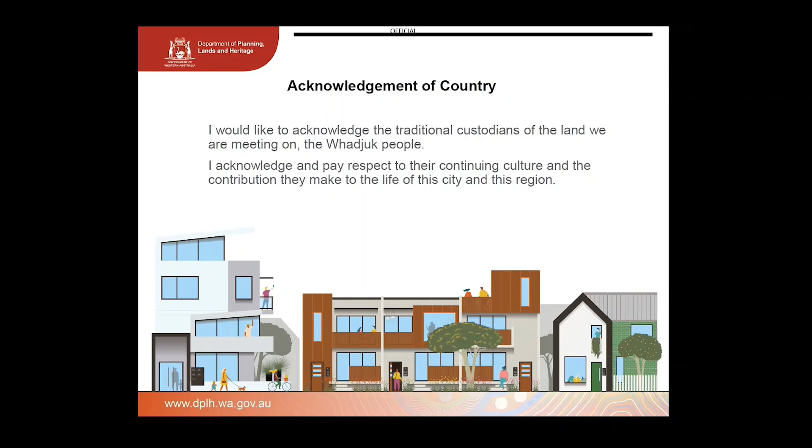So when the project first started, that problem definition phase was undertaken, and it was found that typical medium density development in the state was characterised by excessive site cover, and this included excessive site cover in both greenfield locations and infill locations. It was also characterised by a loss of vegetation and tree canopy, and this was really the removal of existing trees that occurred during the subdivision stage, both in greenfield and in infill, and trees not being replanted or replaced on development sites.

So streetscape was often dominated by garages and crossovers, particularly in greenfield development where narrower lots had double car garages. There was impact on the functionality of internal layouts and room sizes, and we saw a lot of really small bedrooms and small living areas that were really not very functional at all. There was a lack of housing diversity with predominantly 3-bedroom houses with 2 bathrooms and double car garages, and there was a lack of 1- and 2-bedroom housing available.

There was insufficient daylighting, winter solar access and natural ventilation, and really just overall really poor quality outdoor spaces, often largely covered with patios, which impacted the daylighting and solar passive design performance of the dwellings, which led to high household energy consumption.

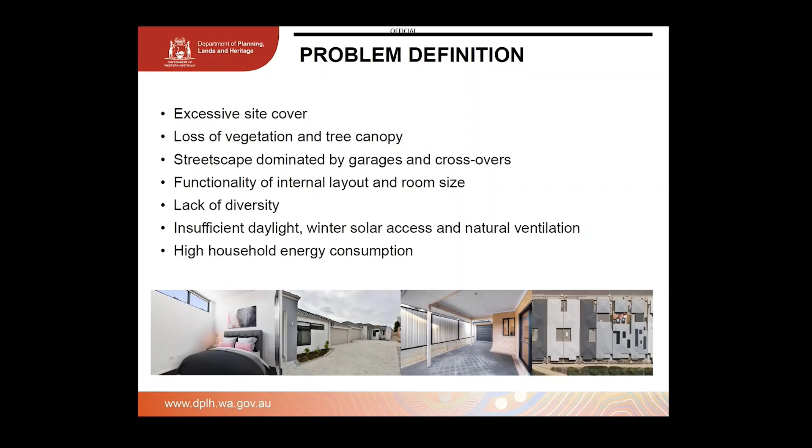So really the policy seeks to counter these issues that we saw and deliver better quality medium density housing. The policy has the opportunity to provide more affordable and right-sized homes and providing more housing choice through incentives for 1- and 2-bedroom houses. It aims to deliver access to sunlight and improving comfort for users and occupants of the dwellings and providing better solar passive design outcomes through solar access requirements.

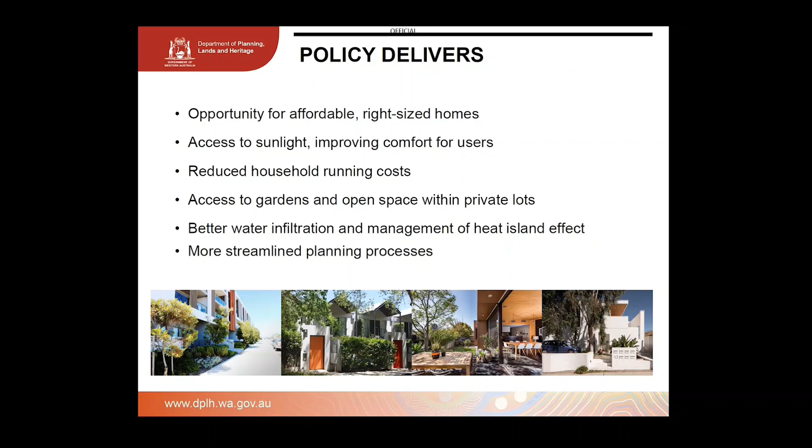It aims to reduce household running costs and have better access to gardens and open space within private lots themselves. So there's larger garden requirements as well, and garden and soft landscaping requirements. It also aims to provide better water infiltration and management of the heat island effect, and this is mainly through permeability and tree requirements. And it provides a more streamlined planning process, so really aiming to provide more clarity for assessors and proponents.

So the policy overview: the R Codes are broken into 2 volumes. There's Volume 1 and Volume 2. So Volume 1 now consists of 5 parts, from Part A through to Part D and appendices. Part A is the operation of the code. Part B includes built form provisions for low density from R2 to R25 for single houses and group dwellings, and R10 to R25 for multiple dwellings.

Part C is the new part to the code, and it applies to medium density built form provisions, and it applies in single houses and group dwellings in R30 plus and multiple dwellings R30 to R60. Part D is the land component, which includes provisions for site area and subdivision.

The R Codes Volume 1 also has an additional document, the explanatory guidelines, which has now been updated to provide further clarity on medium density outcomes for designers and for local governments. And the R Codes Volume 2 now applies to R80 plus multiple dwellings and ROC coded land, with just minor consequential mods following the policy review.

So Part A, operation of the code, establishes the purpose, application and operation of the code and remains fairly unchanged in comparison to Parts 1 to 4 of the existing R Codes. So there is now an additional provision for local planning frameworks seeking to modify the R Codes. And there's a requirement they now need to be consistent with SPP 7 Design of the Built Environment.

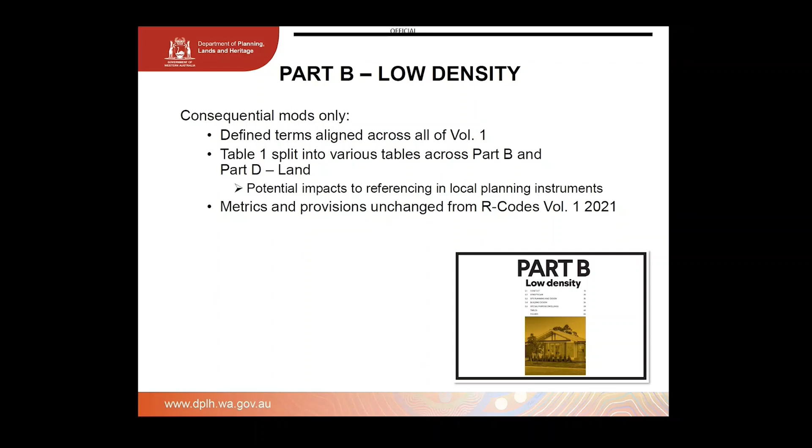So the current R codes remain applicable to low density coded lots at R25 and below in Part B of the R codes 2023. Consequential modifications have been made to some provisions, mainly relating to changes in the definitions. Table 1, the primary controls table, has been split, with the primary controls relating to built form such as open space, setbacks and OLA still remaining with Part B low density. The minimum and average site area requirements have been moved into Part D land. Other metrics and provisions have remained unchanged from the R codes Volume 1 2021, the previous version.

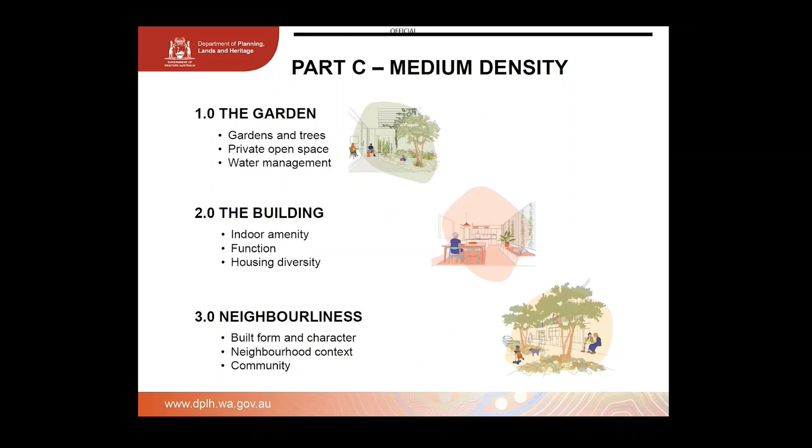Part C, medium density, is split into 3 sections. Section 1 is the garden, and we've put this section first because we wanted to prioritise the location and design of the garden in its ability to provide natural light, daylighting and natural ventilation into the dwelling. Section 2, the building, includes elements relating to the dwelling. So we move internal to the dwelling, trying to ensure better internal performance and occupant amenity. Section 3, neighbourliness, relates to neighbourhood context, so the impact of the development on the neighbours. These elements guide the design of development having regard to local streetscape, residential and community impact. And Blair will take us through some of the key changes to Part C.

So the first element of the garden is private open space. In the R codes 2021, we do have outdoor living areas, so we've improved on this existing element. With private open space, we have a minimum primary garden area. Previously, it was based on the R coding. We've now changed that to the site area. What we found was that sites coded at a higher density were getting reduced garden area sizes, but the dwelling was mainly a lot larger. So we've now switched it to the site area. It doesn't matter about your density code; it's your site area that impacts the size of your garden.

There is a minimum dimension of 3 metres, and we also have the existing 2/3 without roof cover requirement. But we've also added a requirement that where your site is below 161 square metres, you are not permitted to cover any portion of your primary garden area. That's making sure that you work with the primary living space and create a better connection between those 2 elements. As I said before, the intent of these changes was to get a more usable garden area appropriate to the dwelling size and improve access to daylight.

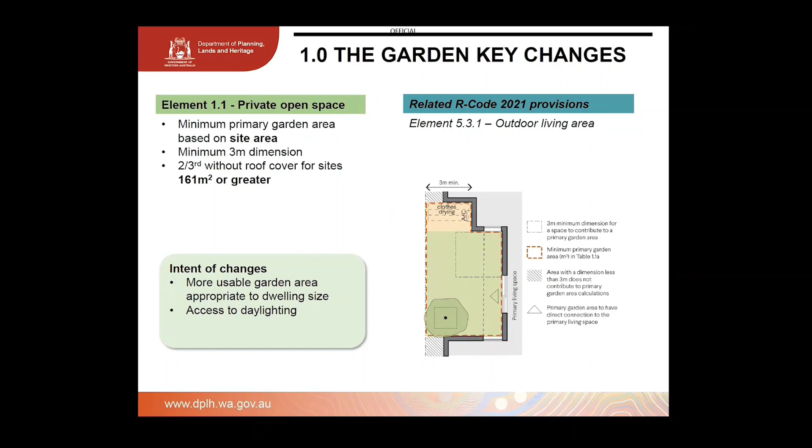Element 1.2, trees and landscaping. We've improved on element 5.3.2 landscaping of R codes 2021. Previously there was a requirement for 1 tree. We've improved this to 1 small tree. The tree has to be a minimum of 3 metres high at maturity, and it needs to have a 9 square metre deep soil area, to ensure that the tree grows. The deep soil area has a minimum dimension of 1.5 metres, and when your primary street setback is greater than 1.5 metres, we also require 1 small tree in that area too.

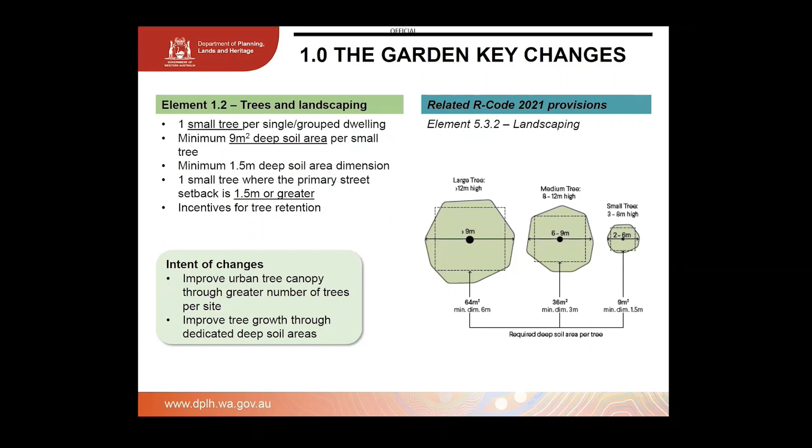We also have incentives for tree retention. If you retain a tree on site, you get a site area concession for a multiple dwelling development, which we'll discuss later in the slides. You can also reduce your landscaping when you retain a tree on site. The intent of these changes was to improve the urban tree canopy through a greater number of trees and also a larger size of tree per site.

On the same element, we require 15% of the overall site to provide soft landscaping. Previously it was landscaping within the R Codes 2021. We've introduced a new definition of soft landscaping, which has a minimum depth requirement in the definition. We also have a 1 metre dimension for soft landscaping.

Under the new R Codes, the front setback area has had its landscaping requirement reduced from 50% to 30%. This has been done because overall the site has to have more landscaping than what the previous R Codes required. The intent of these changes were to improve water infiltration, reduce the urban heat island effect, and improve the streetscapes.

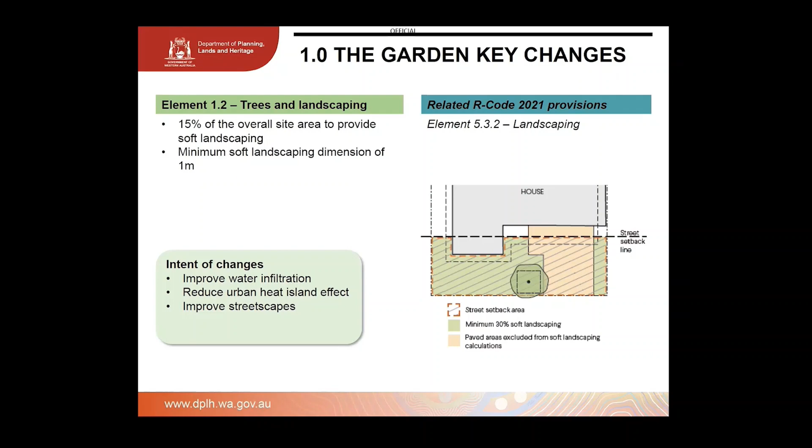So the next section of the medium density code is the building. The first element of that is size and layout of dwellings. Under the R Codes 2021, it didn't really consider the indoor amenity of dwellings, so this is quite a new element to the R Codes.

We did have the primary living space requirement in the 2021 R Code, so we have improved on that. We provided a minimum dimension of 3.8 metres for the primary living space, to ensure that we get a functional primary space within the dwelling. That primary living space has to have direct and physical access to the garden, making sure we have that good connection with the garden.

We also have minimum dimensions for the bedroom, so that's 2.7 metres for the bedroom, and then a minimum 9 square metres for the floor area. Similar to the primary living space, we want to make sure it can be furnished and is a functional area, and for the bedrooms, really to make sure you can fit a double bed in each one. The intent of these changes were really just to improve the amenity of the indoor area and improve the functional use of these spaces.

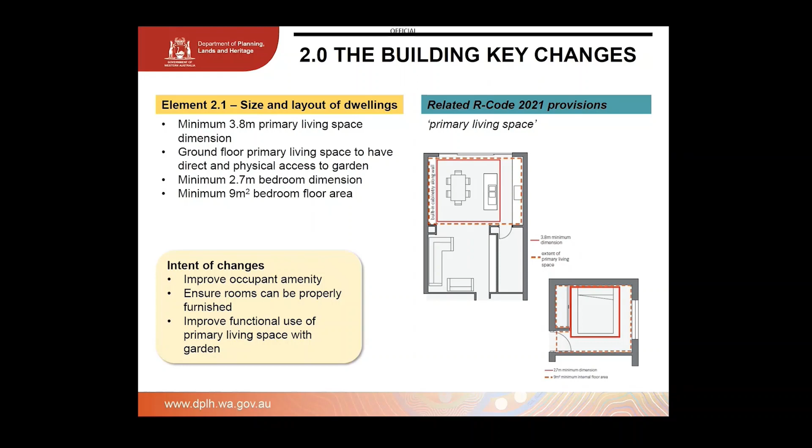Element 2.2, solar access and natural ventilation. Similar to the previous element, this is quite a new provision in the R Codes. We've introduced a minimum of 1 openable external window for each habitable room, which complements the NCC.

With the primary living space, we require a major opening to be oriented between northwest and east. That major opening needs to have an external uncovered area abutting it of a dimension of 3 metres by 3 metres, to make sure we get good daylighting into the primary living space. The 3 by 3 area also prevents an alfresco from covering that good window and blocking daylighting into the primary living space.

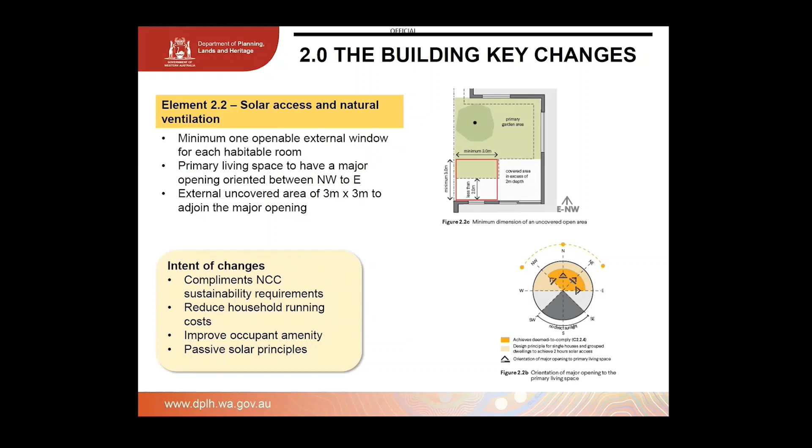The intent of these changes were really just to reduce household running costs by getting good daylighting in, improve occupant amenity, and introduce passive solar principles into the R Codes.

Next element is parking, everyone's favourite element of the R Codes. We have introduced provisions that allow 0 parking bays, where a dwelling has 2 bedrooms or less and is located in location A. You're permitted to provide 0 parking bays.

We do have restrictions on the number of garages and carports you can have on your site. This is really just to make sure we're focusing on providing room for the dwelling and the garden over garages and carports. There's no restrictions on uncovered bays or basement parking, and we do have some bicycle provisions for multiple dwellings.

As I said before, the intent of these changes are really just to focus on the people rather than parking, so provide more space, be it in your primary living space or in your garden, and also just to reduce the extent of covered parking on site. Where your bedroom does not satisfy the minimum dimension and area requirements, it will not contribute to your parking calculations. So you have to think about providing the right number of bedrooms if you want to achieve a greater amount of garages or carports.

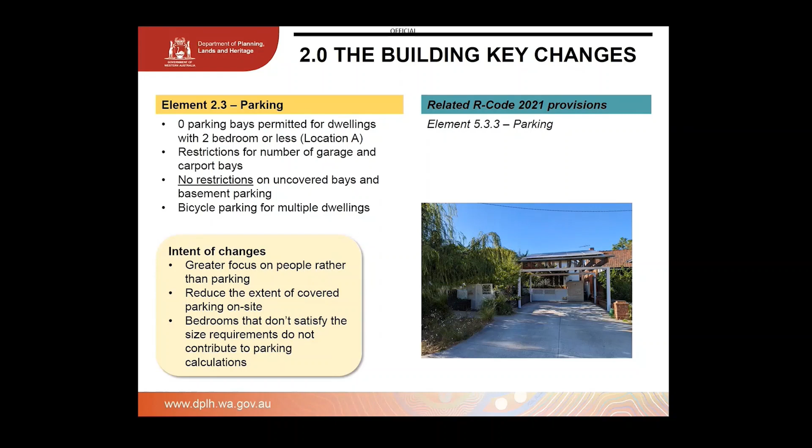So this is just an example of a house design under the medium density code. On the left is a house designed under the R Codes 2021, and on the right is a dwelling designed under the R Codes 2023 during the design testing phase.

As you can see here, the garden is located within the centre of the site, and that's providing a lot more daylighting to the whole dwelling. There's also dual daylighting, from the southern part of the primary living space and the northern part of the primary living space.

We also have 2 trees on site, and you can see the trees are a lot larger than what the previous R Codes required. With the boundary walls, we've got dual boundary walls. We've also got reduced setbacks, so the setbacks of the walls have been reduced down from 1 metre for a 1-storey dwelling.

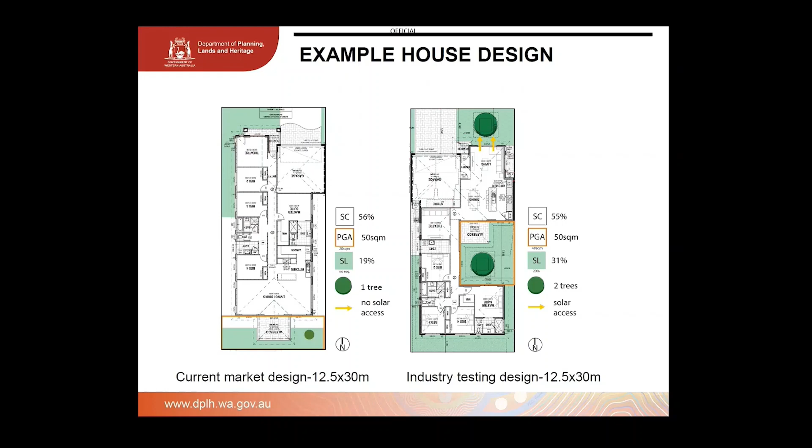This element relates to element 5.5.2, aged or dependent persons dwelling. In part C of the new R Codes, there is no longer an aged or dependent persons dwelling requirement - it's now called universal design. There's gold level universal design requirements that are required to be eligible for a site concession.

There's also a 20% silver level universal design mandated for 10 or more grouped or multi-dwelling developments. Compared to the aged or dependent persons dwelling, we've removed the over 55's occupancy restriction, as well as the minimum of 5 dwellings. This is really just to allow greater uptake of universal design requirements, to allow more dwellings to provide more allowance for ageing in place and greater housing diversity.

It also increases the stock of accessible homes and provides for a more simplified assessment, where in Appendix 4 there's universal design requirements for gold and silver level.

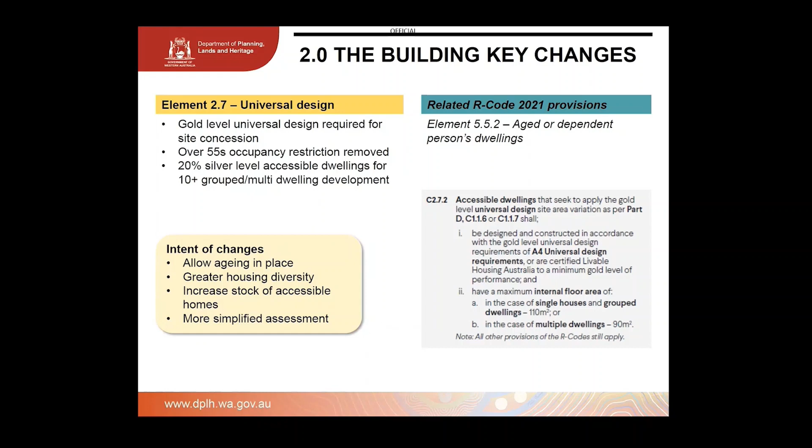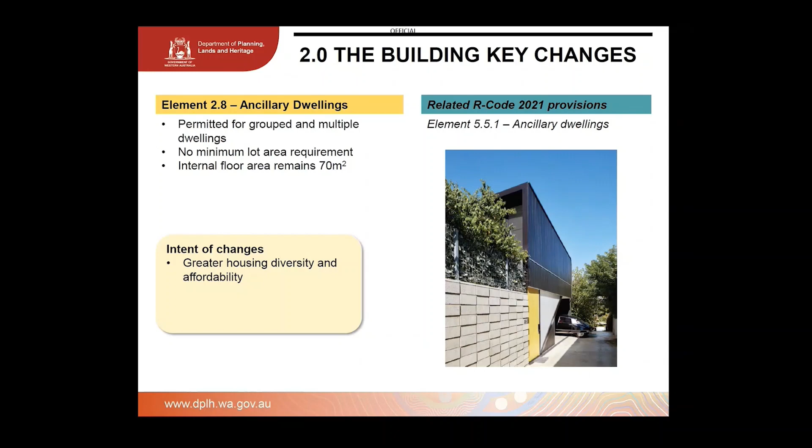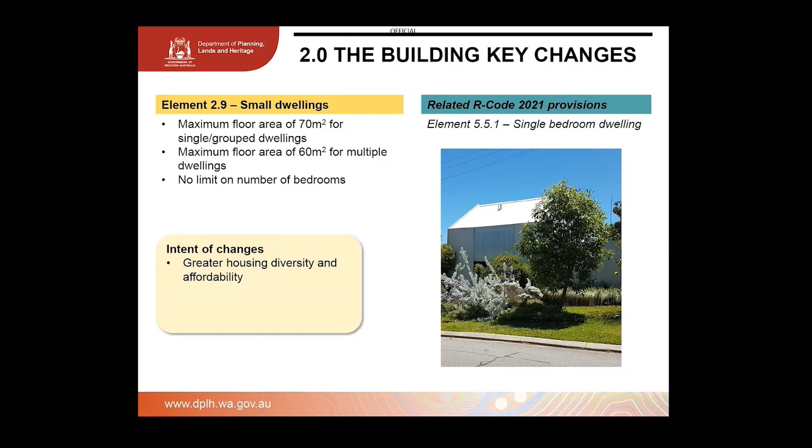of 60 square metres for multiple dwellings. Again, that's just to increase housing diversity and affordability.

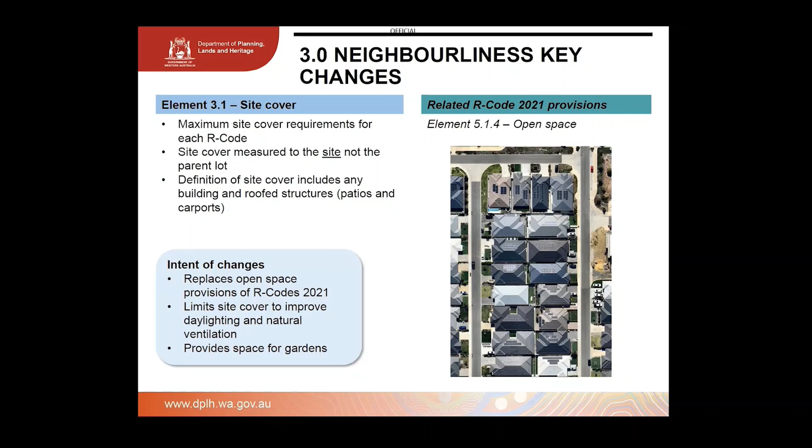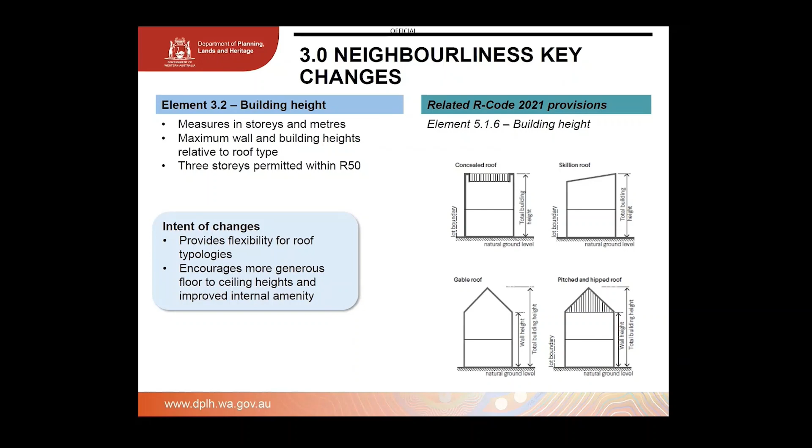So the intent of the changes here are to provide flexibility for roof typologies and allow for greater flexibility for varying roof typologies, and it really encourages more generous floor to ceiling heights, so you might be getting lofts or mezzanines, and to encourage improved internal amenity.

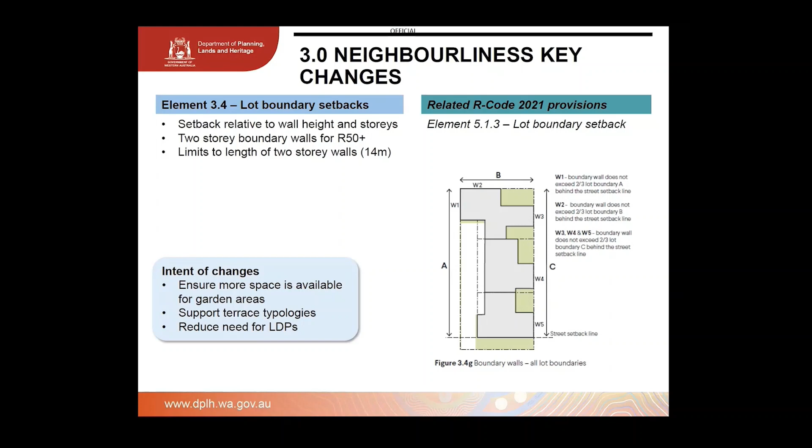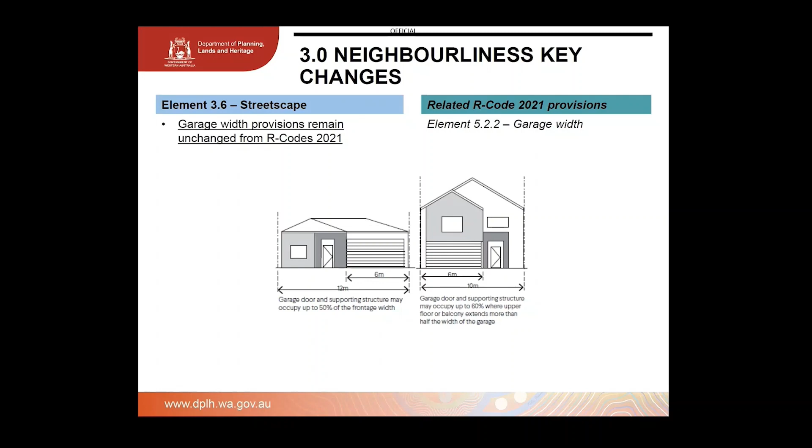So element 3.6 is now streetscape, and that relates to element 5.2.2 garage width in the previous R codes. The garage width provisions actually remain unchanged from the R codes 2021. Where you have a single-story development, the garage door is permitted to take up 50% of the frontage width, and where you have a double-story development, the garage door is permitted to take up to 60% of the frontage width.

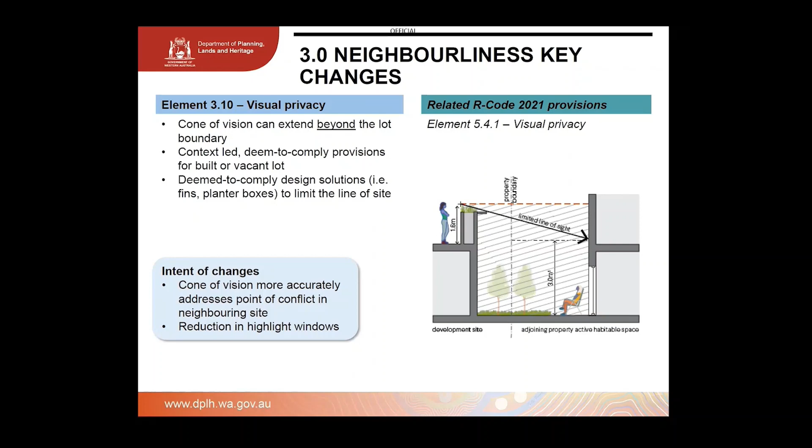Part D, I'll pass over to Matthew, who's going to cover Part D, land.

So Part D is land. As Jenna mentioned, Table 1 of the current R codes, the site area controls are separated out into this section with other built form provisions throughout Part B, low density, and then Part C, medium density, were related.

So some key changes here: there's some new site area concessions, so there's a 35% site area concession as opposed to 1/3, and they're for gold level accessible dwellings and small dwellings. The key change here is that there's no minimum number of dwellings, and there's no occupancy restrictions specific to those gold level accessible dwellings.

And as Jenna mentioned, for universal design, it's really about encouraging this product out into the market. So there's different settings for R30 to 40 and then for R50 plus. And this is a clear distinction between your suburban and urban areas and being lesser or more serviced. So a greater uptake in density in your R50 plus is potentially more appropriate.

And multiple dwellings are now measured in site area rather than plot ratio. And there's some guidance in Planning Bulletin 113 with some slight changes there in that sense. So what is unchanged is the site area concessions for aged or dependent persons dwellings and single bedroom dwellings. So, as you previously noted, they still apply from R25 and below.

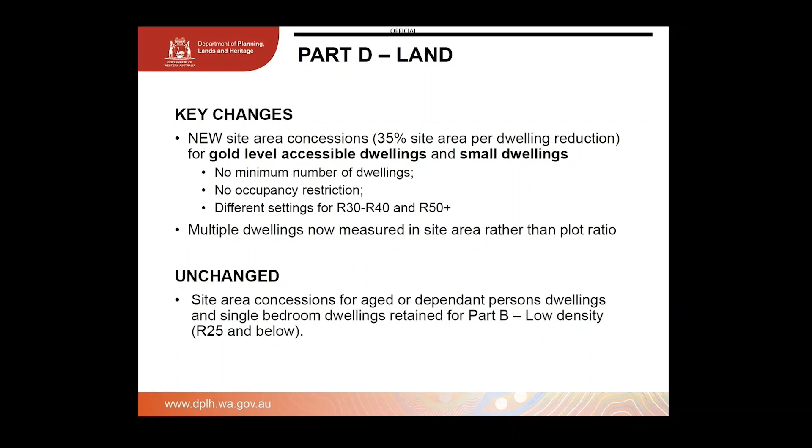There's a new site area concession for retaining a significant existing tree, as Blair alluded to. It's a 10% site area reduction for multiple dwellings only. So it's only when you're proposing a multiple dwelling. And this will be considered through a development application process. This site area concession would apply to any dwelling that doesn't already have a site area concession applied to it. And as noted, there is a change there with site area from previously being plot ratio, and Planning Bulletin 113 has been amended to suit that.

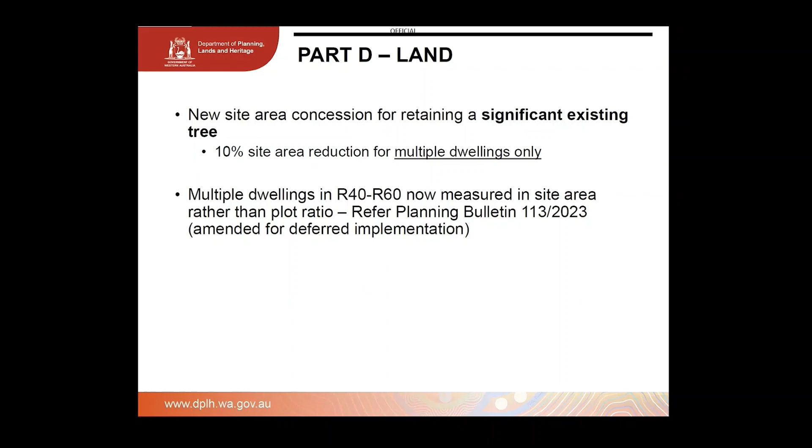With respect to local planning frameworks, we think there's a reduced need for modifications. The policy responds to a lot of components that are dealt with through local development plans and local planning policies. And with a whole range of new provisions, there is some more WAPC oversight for when those modifications are being sought. So new provisions not previously dealt with that we've discussed in this presentation. There's a highlighted importance of pre-lodgement, which the WAPC will engage in. We encourage local government to engage in it when commission approval is not required for a local planning framework modification.

We'll also be releasing assessment templates. So we will be using internally an assessment template. It will be available on the website for considering modifications to the R Codes via a local planning policy and also to a local development plan. So 2 assessment templates. We will be using those, and we encourage the use of them for local governments as well, again, where commission approval may not be required.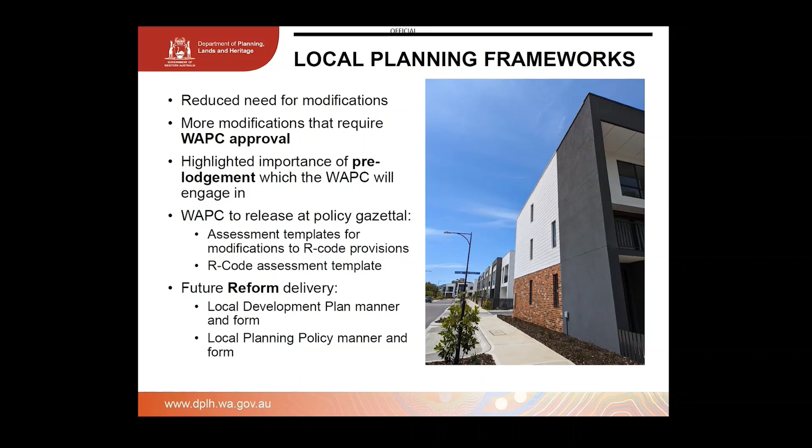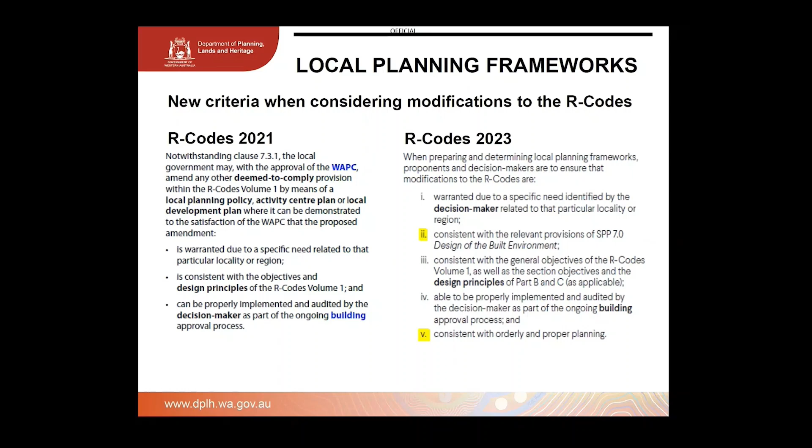With the transitional arrangements, there's 2 key components that we were looking for. So we need to facilitate the sold but not yet commenced house and land packages, and they're tied to lot size and the current R Codes, and generally where those R Codes are modified through a local development plan, where there would be issues with the new policy triggering development approvals. So facilitating the delivery of that product without introducing any red tape. And also facilitating local governments to review their local planning frameworks to align with the new R Codes.

So with the transitional arrangements, Planning Bulletin 114 provides clear guidance on what applies when during the deferred gazettal and the special transition period. We recommend that you read this if you're a local government officer, a consultant or anyone navigating the transitional arrangements, the deferred gazettal period even that we're in now, whether it be related to a structure plan, a scheme, a local development plan, a development application, and the like. So we'll discuss that now.

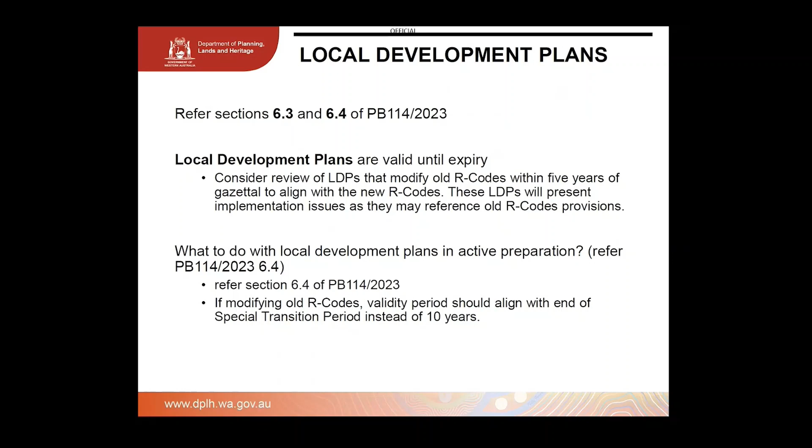Now, if you're considering a local development plan currently, it's recommended in the planning bulletin that the validity period aligns with the end of the special transition period. Otherwise, you could tailor the LDP to suit the provisions of the medium density, so that it can have a more appropriate life in terms of the 10 years maximum that you can support in the deemed provisions.

With structure plans, the structure plans that modify the deemed to comply will expire in 2025, and that's as per the 2015 regs that were introduced. Structure plans no longer modify the deemed to comply, so that's quite a fortuitous time frame that's lined up quite nicely. And if you're considering a structure plan currently or an extension to a structure plan, you should still consider the capacity of the subdivision stages to facilitate development to achieve the medium density codes.

For local planning schemes, local governments are encouraged to review scheme provisions that reference the old R Codes or modify the old R Codes, with a view to align with the new R Codes, so 2023. This could be done as an omnibus amendment. We know these regularly occur at local government in a planning sense. Otherwise, it can be done at the next scheme review.